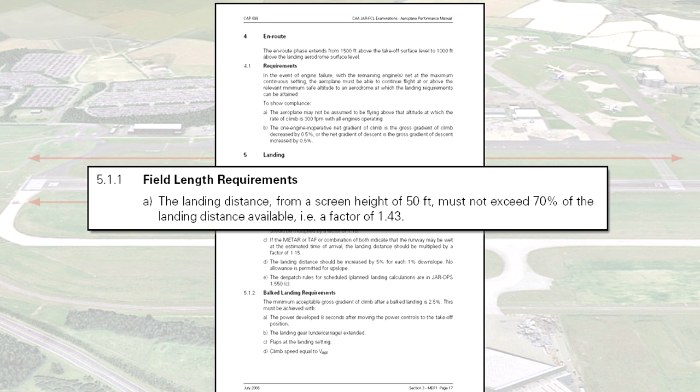Having discussed the regulation requirements detailing the maximum landing distance that must be available at a destination airfield or alternate airfield, we will now examine in detail the regulations governing how the landing distance is calculated given non-standard conditions.

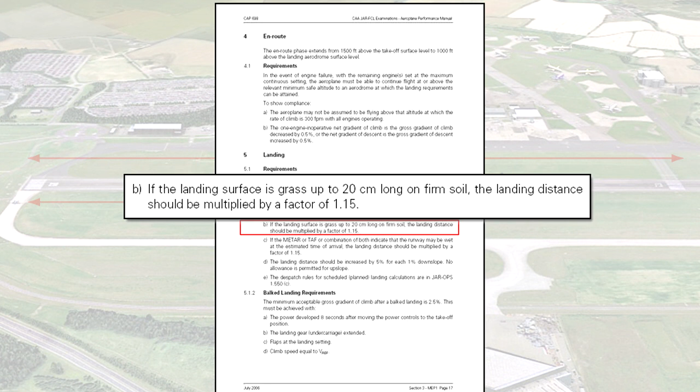In Cap 698, Section 3 on page 17, under point 5.1.1b, we read that if the runway is of grass up to 20 centimeters high, the landing distance should be multiplied by a factor of 1.15. This would effectively increase the landing distance by 15%.

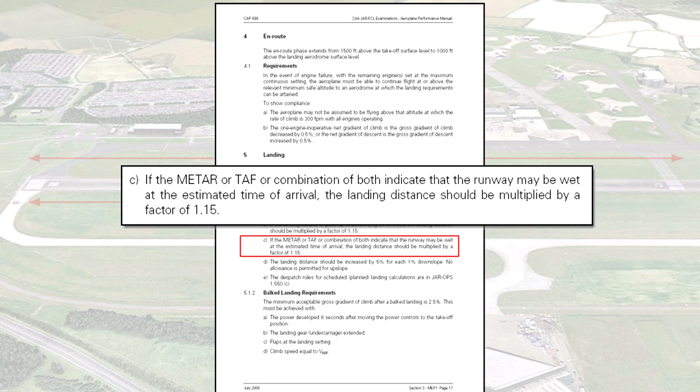Point C states that if there is an indication that the runway may be wet at the estimated time of arrival, the landing distance should be multiplied by a factor of 1.15. Again, multiplying the calculated landing distance by a factor of 1.15 will increase the landing distance by 15%.

Point D states that the landing distance should be increased by 5% for each 1% downslope. This means that for a 1% downslope, the landing distance should be multiplied by a factor of 1.05. Therefore, for a 2% downslope, the factor would be 1.1.

Point D also states that no allowance is to be permitted for upslope. The reason for this is that upslope will reduce the landing distance. If a pilot were to ignore the reduction in the landing distance, then a margin of safety would be incorporated into the landing distance calculation.

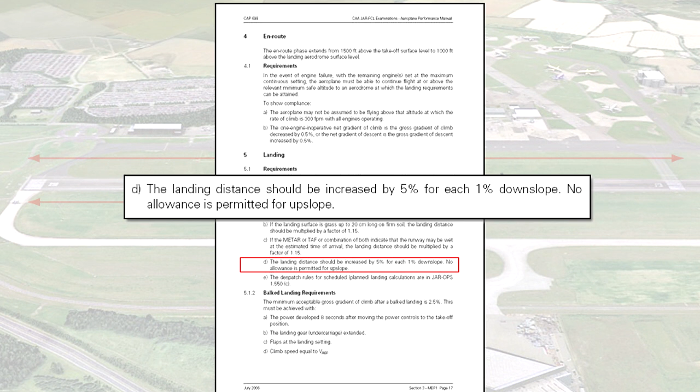Lastly, point E states that there must be compliance with the dispatch rules for scheduled or planned landing calculations, and that these can be found in JAR Ops 1.550 paragraph C.

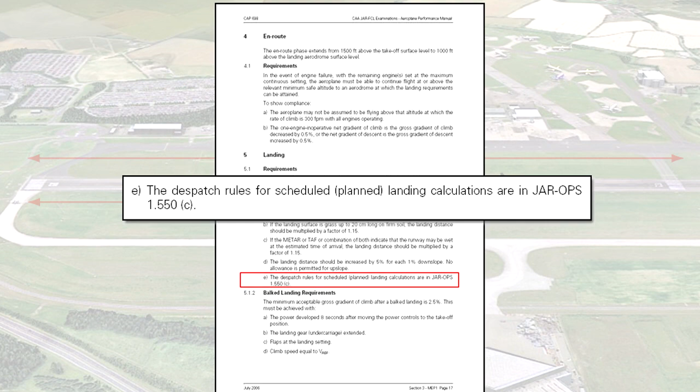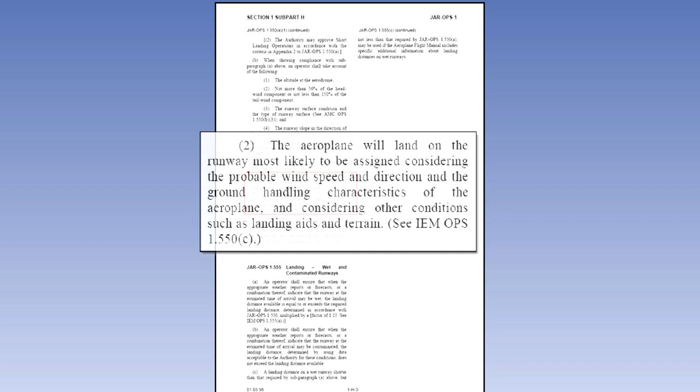The dispatch rules found in JAR Ops 1.550 paragraph C state that for dispatching an aeroplane, it must be assumed that, firstly, the aeroplane will land on the most favorable runway at the destination airfield in still air, and, secondly, that the aeroplane will land on the runway most likely to be assigned, considering the probable wind speed and direction.

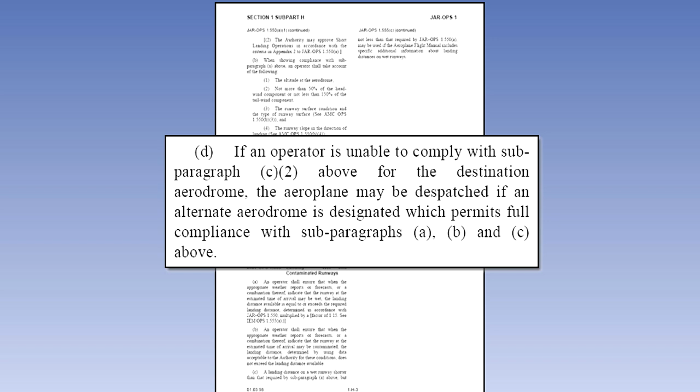If this second assumption cannot be met, the aeroplane may be dispatched only if an alternate aerodrome is designated which full compliance of the regulatory dispatch requirements can be met.

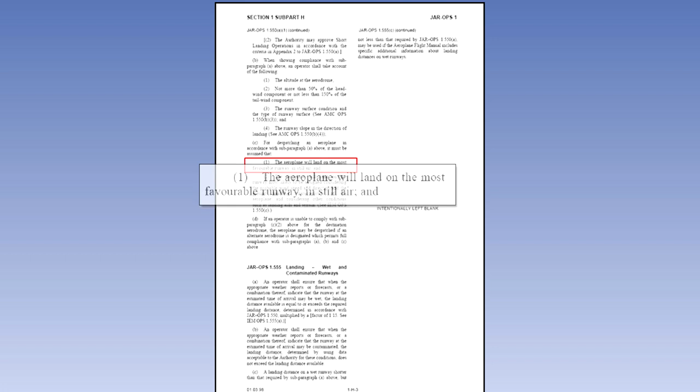These dispatch regulations may sound a little complicated, so let's examine them further. The first assumption is that the aeroplane will land on the most favorable runway in still air or zero wind. This means that, assuming zero wind at the destination airfield, the runway which would accommodate the largest possible mass would be selected, since that is the most favorable runway.

In our example on screen, assuming zero wind, runway 04 and runway 22 both allow a maximum landing mass of 1,500 kilograms. But runway 31 and runway 13, being much shorter runways, allow a maximum landing mass of only 1,000 kilograms.

Therefore, the most favorable runway in still air is either runway 04 or runway 22, which both allow a maximum landing mass of 1,500 kilograms.

The second dispatch assumption is that the aeroplane will actually land on the most likely runway to be assigned considering the probable wind speed and direction.

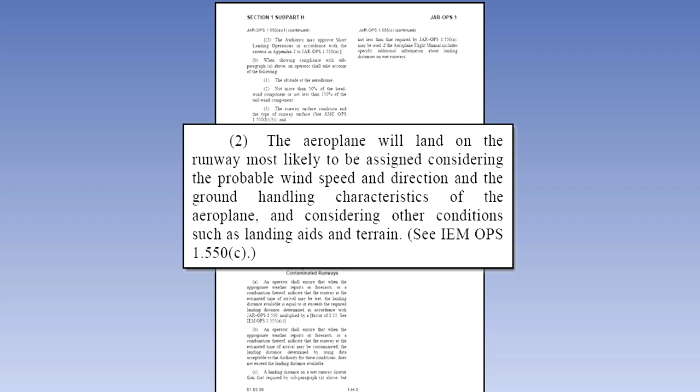In this case, runway 04 has a strong headwind for the landing, which will allow the aeroplane to land at a much greater mass than if there were no wind. In our example, the headwind has increased the maximum landing mass to 1,750 kilograms.

However, runway 22 has a tailwind, which will decrease the maximum landing mass to 800 kilograms. Runway 31 and runway 13 both have a full crosswind. Therefore, the maximum landing mass for these two runways will be the same as for still air.

If the second dispatch assumption is that the aeroplane will land on the runway most likely to be assigned considering the probable wind speed and direction, then it would have to be runway 04 with a maximum landing mass of 1,750 kilograms.

In summary then, the first assumption requires that the pilot select runway 04 or runway 22 for a maximum still air landing mass of 1,500 kilograms, and the second assumption will require the pilot to select runway 04 for a maximum landing mass of 1,750 kilograms.

Now we need to consider what to use as the dispatch mass of the aeroplane. If the aeroplane was dispatched at 1,750 kilograms, and then, on arrival at the airfield, the wind was less than forecast, the aeroplane would not be able to land. Therefore, the aeroplane must be dispatched with a mass of 1,500 kilograms.

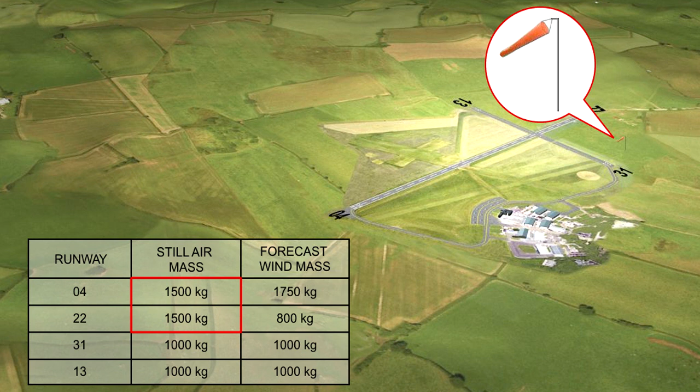Dispatching the aeroplane with this mass would mean that, no matter what conditions prevailed at the destination airfield, the aeroplane will have a mass that will allow it to land at the airfield. The way to simplify the dispatch rule is always to consider the greatest mass in still air and the greatest mass in the forecast wind conditions, and, of the two, take the lesser mass as the dispatch mass. Of the two, it is the still air mass that is usually the lesser mass, as shown in our example.

The exception is when there is a tailwind on a unidirectional runway. A unidirectional runway is a runway whose direction for takeoff and landing is fixed in one direction. And in this case, the maximum landing mass in the tailwind will be less than the maximum landing mass in still air.

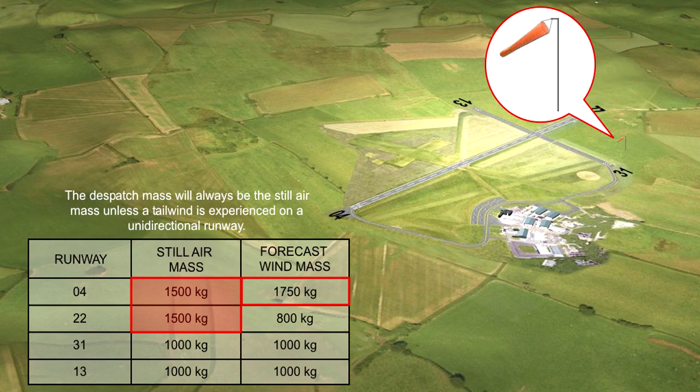This part of the lesson will deal with how the aeroplane's landing distance can actually be calculated. All aeroplanes will either have a pilot operating handbook or an aeroplane flight manual. The purpose of these manuals is to show not only how to operate the aeroplane, but also to detail the aeroplane's performance. Shown on screen is an example of the landing performance information.

The example graph we will use is figure 3.9 on page 21 of section 3 in CAP 698. Always take a look at the associated conditions first, paying particular attention to the power and flap settings as shown here.

Also notice that this graph assumes a runway which is paved, level, and dry. If the runway conditions required for a given calculation are different, corrections will need to be made to the values that this graph will give. We saw these correction factors earlier.

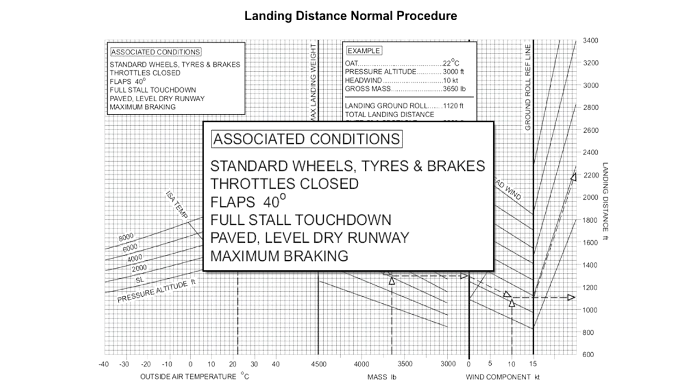Notice this area here, which highlights the obstacle height speed for different weights. This is actually the reference landing speed. The regulatory speed at the landing screen height is called VREF, and, for Class B multi-engine aeroplane, it had to be no less than the greater of VMC, or 1.3 times the stall speed in the landing configuration, 1.3 VSO.

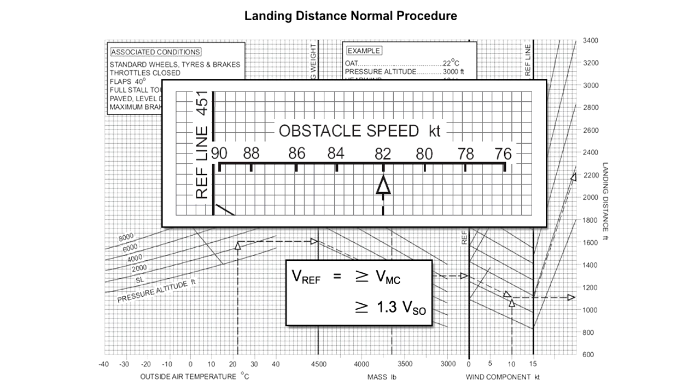A pilot must adhere to the VREF speeds shown here because they are the speeds that have been used to construct this graph. If a pilot were to deviate from these speeds, then the required aircraft performance would not be achieved. Having looked at the various bits of information associated with the graph, let's now examine the graph itself.

The left-hand carpet of the graph involves the variations in temperature and pressure altitude. This part of the graph accounts for the effect of air density on the landing distance.

In the example, we will assume a temperature of 5 degrees Celsius at a given airfield situated 4,000 feet above mean sea level. To use the graph then, move upwards from 5 degrees Celsius until you have reached the 4,000 feet pressure altitude line. Then move right until you meet the reference line, shown here.

The next variable is mass. In our example, let us assume a mass of 3,400 pounds and a VREF of just below 80 knots. From the reference line, we must move down, using the sloping guidelines, until we reach 3,400 pounds, as shown here. From this point, we go horizontally to the right until the next reference line.

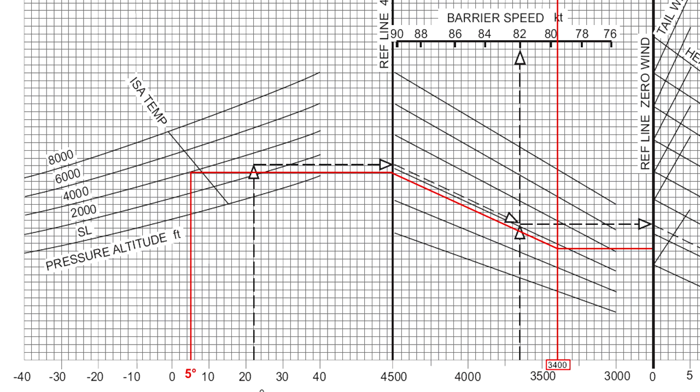The next variable is wind. In our example, we will assume a 10-knot headwind. Notice, though, that the slopes of the headwind and tailwind lines are different. We therefore recognize that the 150% tailwind and 50% headwind rules that you learnt about in the General Principles for Landing lesson have already been applied. Travel down the headwind line until you reach 10 knots headwind, and then move horizontally right once more, up to the last reference line.

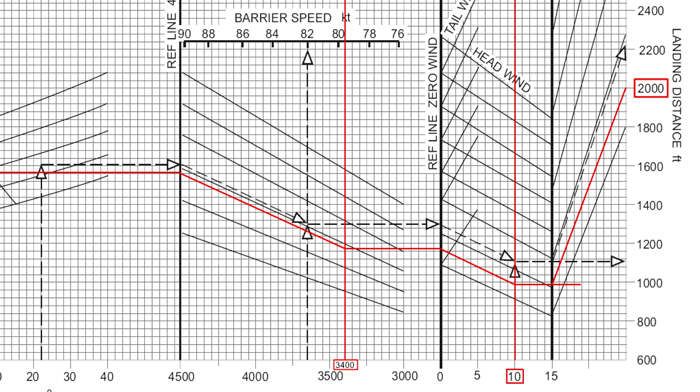Remember that the landing starts at the 50-foot screen height. From this point on the graph, we must move up the sloping guidelines to the end. The landing distance in our example is approximately 2,000 feet from the 50-foot screen to the full stop. The landing roll, the ground section of the landing, is just 990 feet.

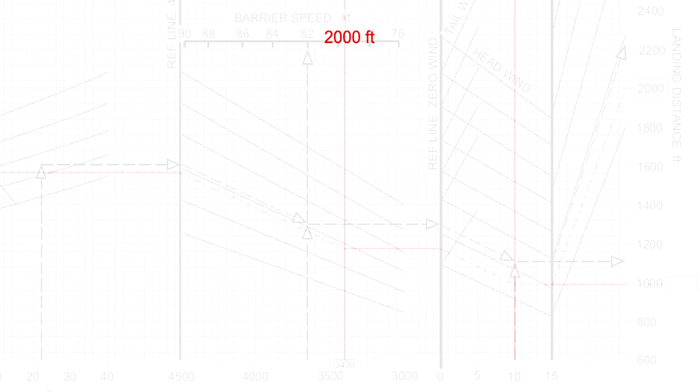Let us now assume that the runway has a grass surface and that the grass is wet. Remember that both these variables cause an increase in the landing distance. Since the graph assumes a paved, dry runway, we will have to make a correction for the different conditions. You may recall that grass increases the landing distance by 15%, or by a factor of 1.15, and a wet surface also increases the landing distance by 15%, or by a factor of 1.15.

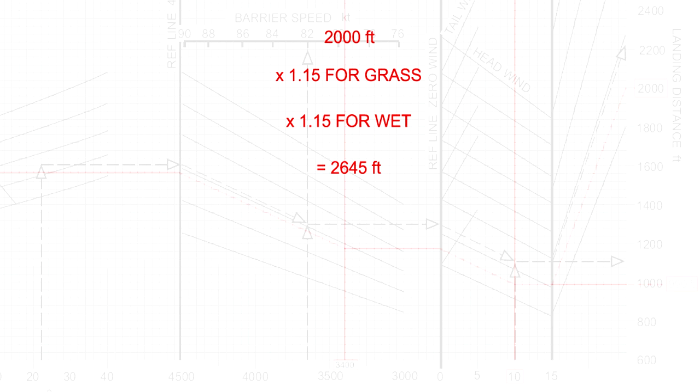Our calculated landing distance is 2,000 feet, but correcting it for grass means we will need to multiply this by 1.15, and again by 1.15 because the grass is wet. This now makes the landing distance 2,645 feet. Let us now assume that the runway has a downslope of 1%.

You may recall this would increase the landing distance by 5%, or by a factor of 1.05. This now makes the total gross landing distance 2,777 feet. To comply with the regulations, you may recall that the landing distance must be within 70% of the available distance at the airfield.

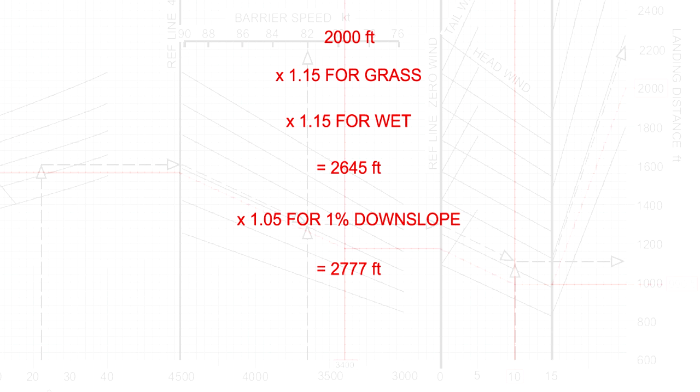Therefore, multiply 2,777 by 1.43. This means that our landing distance available must be at least 3,971 feet.

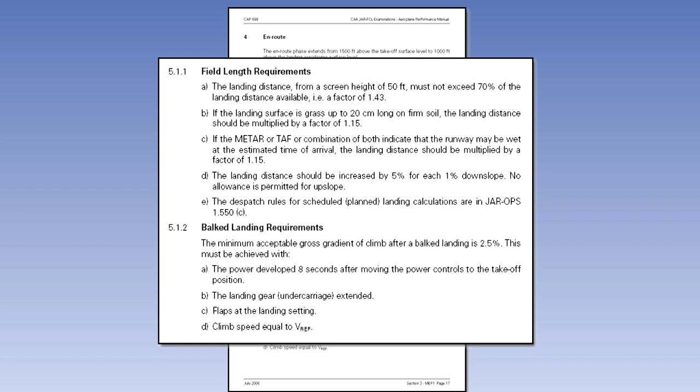Before this lesson ends, let us briefly look at the pages in CAP 698 regarding the multi-engine Class B aeroplane for landing. Page 17 and 18 of Section 3 detail the landing distance requirements and climb gradient requirements that we mentioned already. Near the top of page 18 is an example of how to calculate the one-engine-out gradient using figure 3.7.

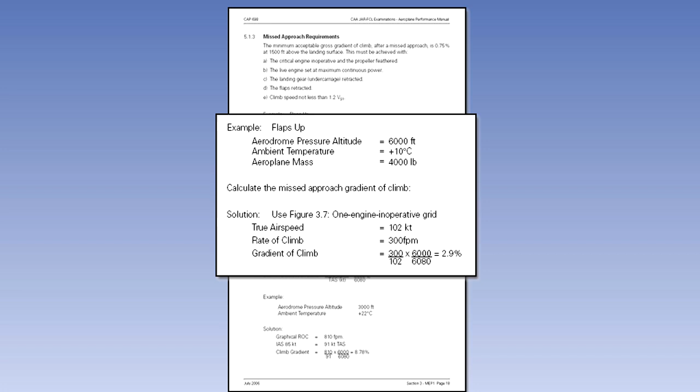The bottom half of page 18 is another example of how to calculate the climb gradient, but this time using all engines operating, and it refers to figure 3.8. Work through these examples, especially on how to change a rate of climb into a gradient, because the two graphs used in these examples do not directly provide a gradient. It must be worked out.

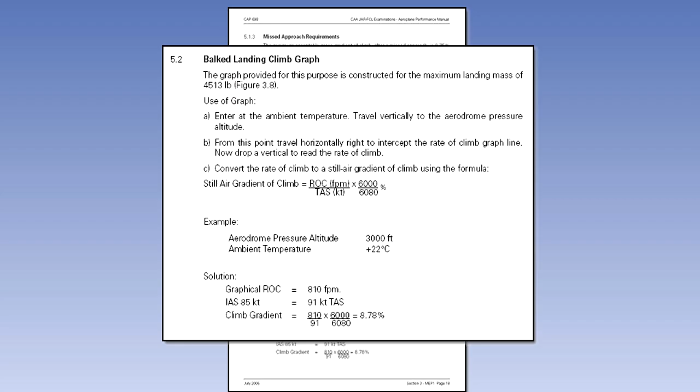Page 19 is the balked landing climb graph, figure 3.8. This graph assumes both engines are operating. Again, this graph only provides you with the rate of climb. If you need to calculate the gradient to check whether you meet the all-engine climb gradient requirement, then you must convert this rate of climb to a gradient.

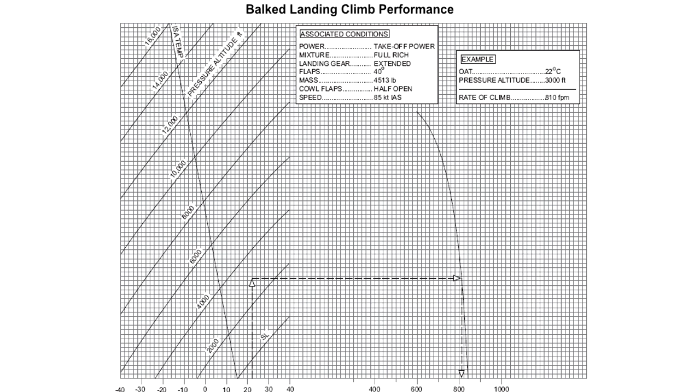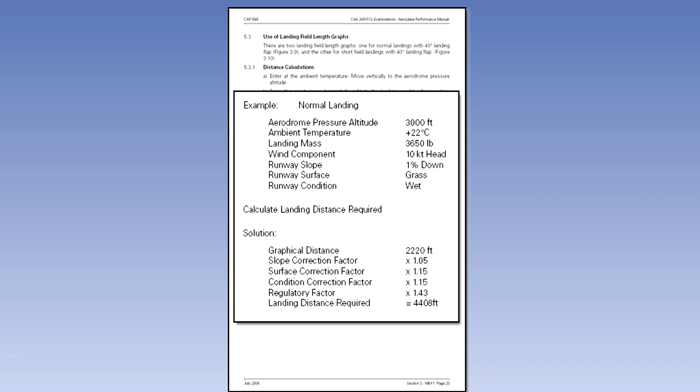On page 22, there is one more example, but this time it is how to calculate the maximum landing mass. This example uses a graph on the next page, which is the short field landing distance graph.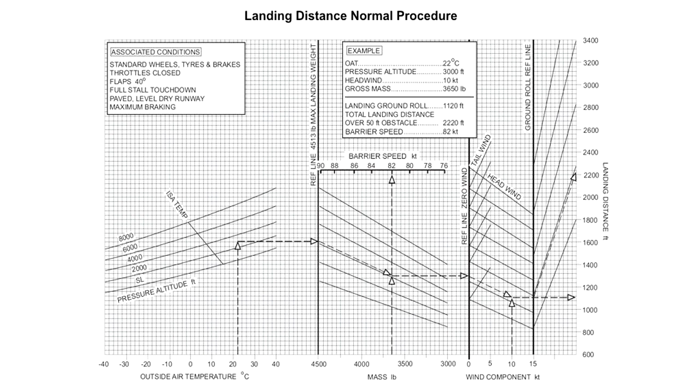Hopefully you are now able to work through the landing graphs for Class B multi-engine aeroplanes and make the corrections to the graphs for any conditions that are not accounted for by the manufacturer. If you need further practice in using the graphs to increase the accuracy of the results, we suggest that you work through the examples in CAP 698 that we just mentioned, or use the questions which test you on what you have learnt in this lesson.

That concludes the section on Class B multi-engine performance. The next section of aircraft performance will focus on the Class A medium-range jet aeroplane.